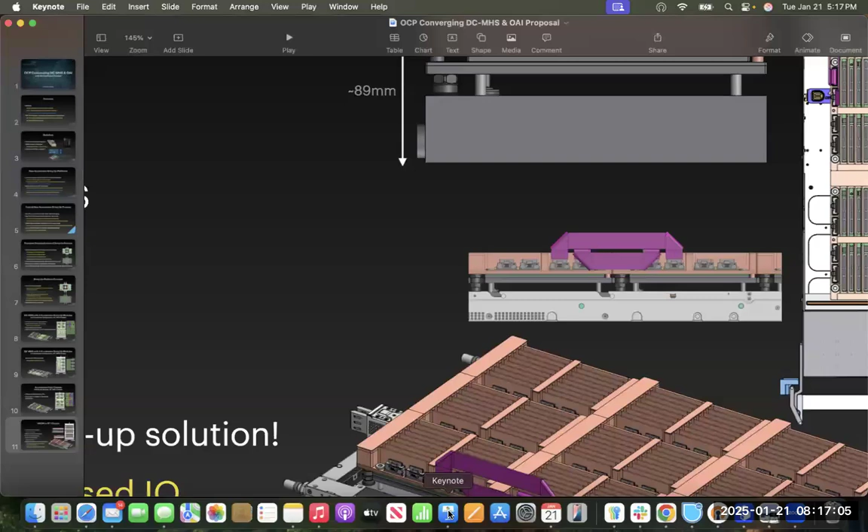Okay, so what I wanted to do is switch back to our presentation from the last meeting, where we were talking about this Bring Up platform and the migration we're seeing. We're talking basically about the Open Systems for AI initiative, which is looking at bringing the DCMHS and OCP OAI chassis together in what we're calling Open 72, taking inspiration from what NVIDIA have done, from their DGX HGX towards the NVLink NVL72 rack scale computing.

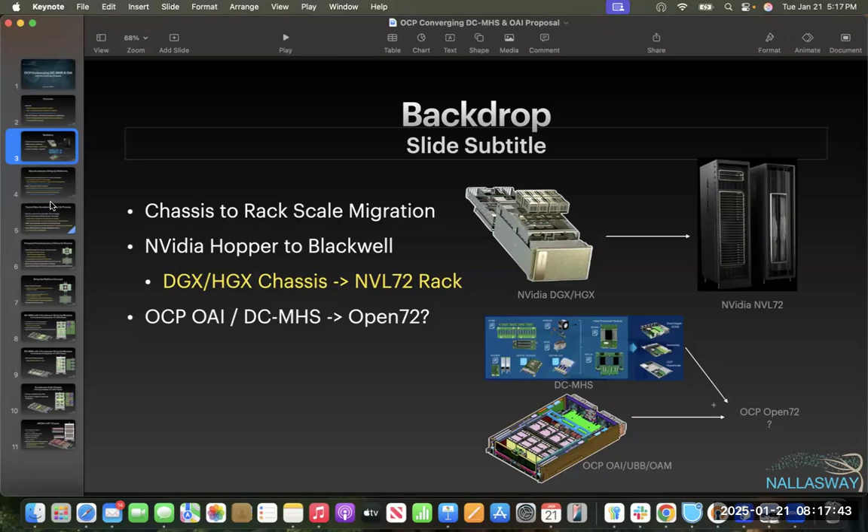What we were talking about is this Bring Up board as maybe a nice concept that we could bring into making deployable Bring Up products that could be integrated into DCMHS, and actually have a process that we were talking about here.

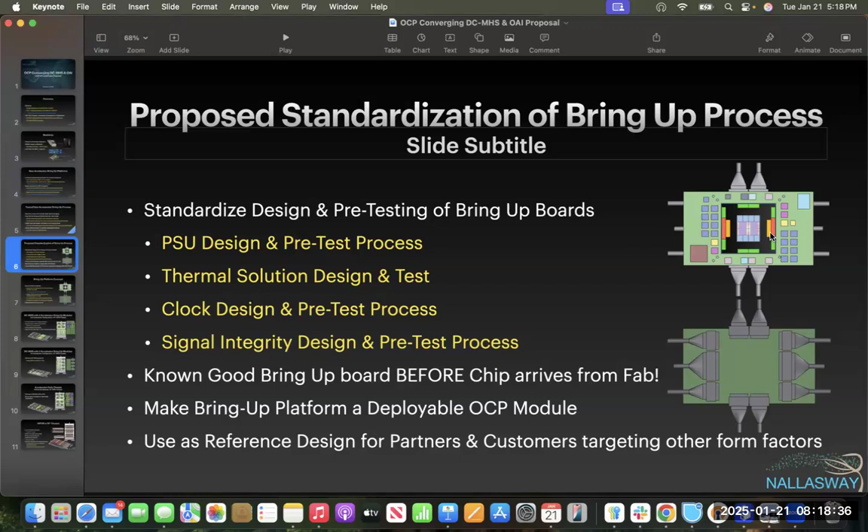These pictures here were the basic idea of having a cabled module where we could cable things together inside the DCMHS chassis. For those of you that remember, we were having the interconnect brought out underneath the cabled I/O so that the tops would be clear for thermal management—either water cooled, hybrid water and air, or an air cooled solution.

So we went through some pictures of that, showing 4 modules cabled up with these HPM, the CPU boards that are part of the DCMHS standard. We started in a 19-inch rack. In my efforts, we're probably going to switch over to the 21-inch rack as a preferred solution, but I did want to try and squeeze this into a 19-inch, so it was an option. This picture here was showing the potential cabling of a particular given topology and how that would look.

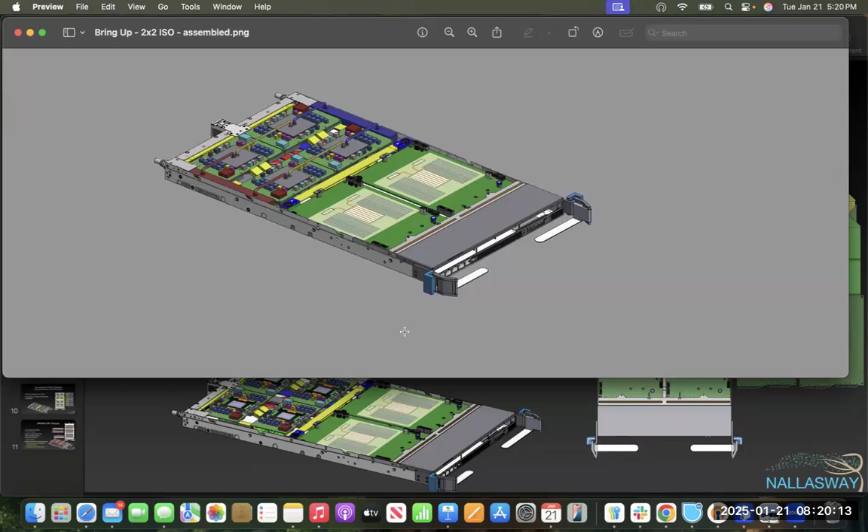Let me just grab a couple of pictures here. So here's our latest update. We started to integrate in some of the water pipes coming in - this is like a water cooled example, can we get all this and fit it into a 1U box? We've got the cables underneath, so we're trying to put some infrastructure into the chassis. Again, this is cartoon stuff - I'm not a mechanical engineer, so this is just cartoon stuff that maybe we can get mechanical engineers to at least have a starting point as to what our thinking is like.

What did I want to show? This one here is maybe a good one. This is the back side of the modules, and the key thing here is these connectors. As you can see, we've got a frame here, and this frame needs a little bit of modification still - it's not the finished article, but this was going to give stiffness to the board. It was also going to hold these connectors in place mechanically, which I'll get into in a moment. Also, if we did have vertical power delivery, this could provide a little bit of a heat sink for cooling the vertical power regulators on the back of the board - you could get airflow across them.

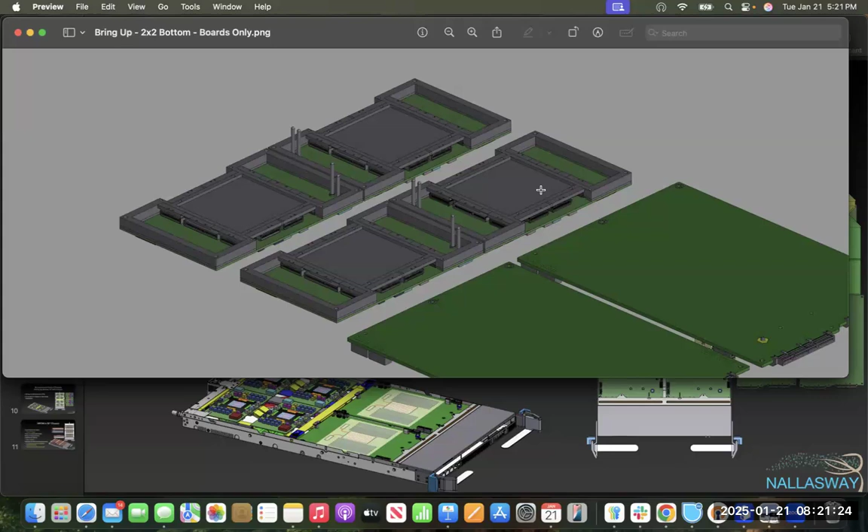So that's where we've got with the concept, and I'm starting to talk with full-on engineers in terms of getting this modeled up properly. Diving into the connectors, let me just bring the model up itself. So here is the model, as we can see, with this frame on. If I just take the frame off a moment...

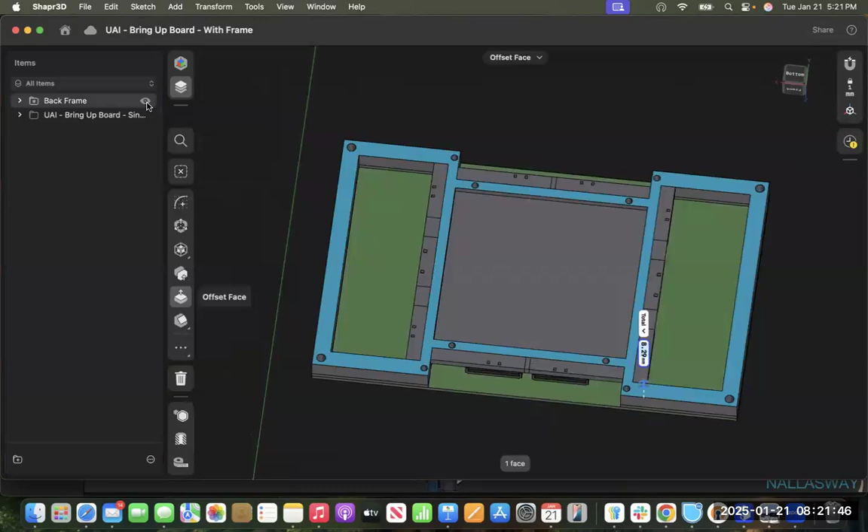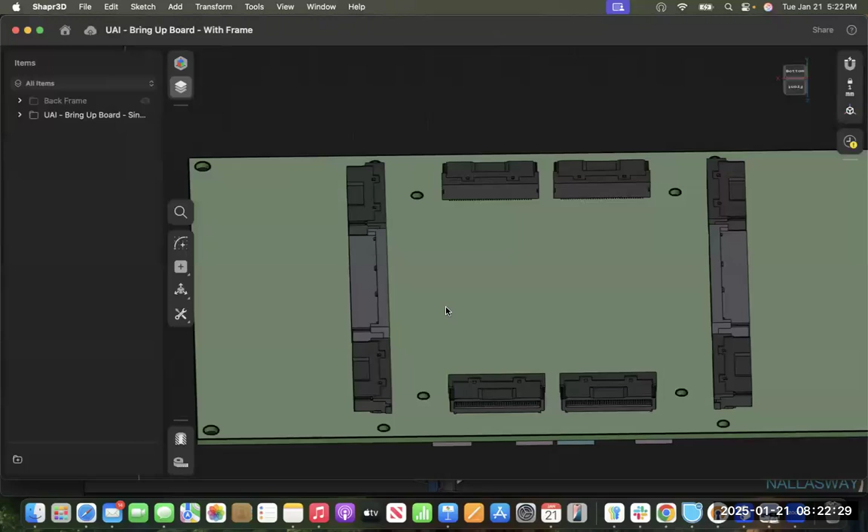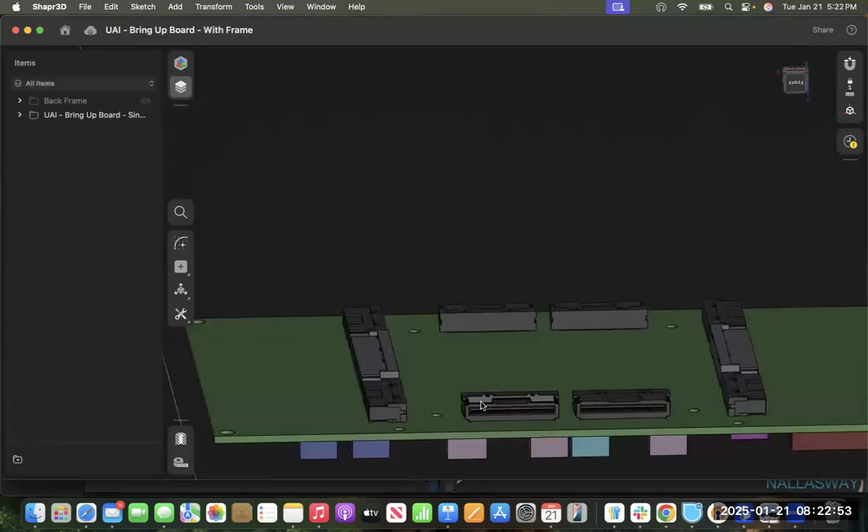So what we've done is - this is a standard MCIO connector, but we've actually taken the metal shell off of it, which also had the through hole features in the metal shell. So this is just the plastic bodies, and they also had plastic alignment pips that were needed for going through the board, and we've got rid of those as well. So these are full surface mount.

I wanted to just start asking a few questions of our connector experts on the call in terms of what we're doing here. So firstly, that's the idea - we would pick and place these connectors as we see, and the first problem that comes up is their alignment. Without the alignment pips, what is our probability of getting a good alignment? I guess while we're on that part, let's just cover that now.

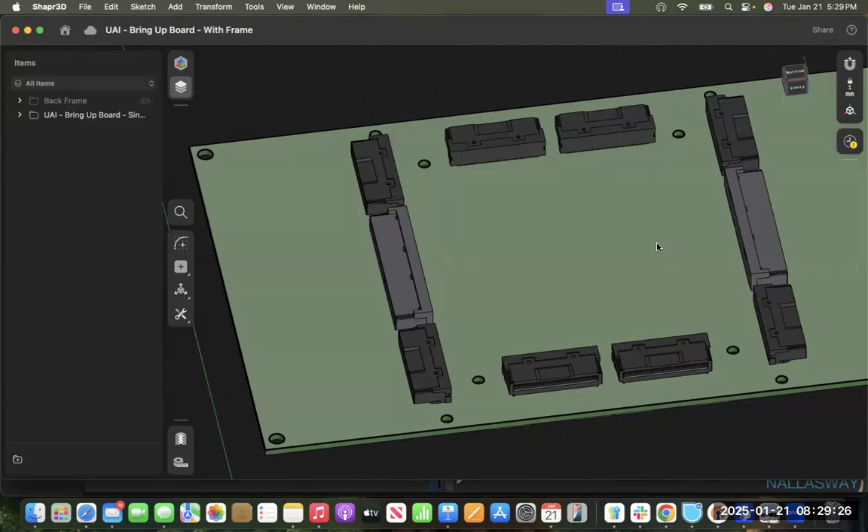Are you familiar with that approach when you're putting multiple connectors down, and have you guys ever done that? I think that's somewhat common, that there's a frame, but the pick and place process is incredibly accurate, and the vision systems used for lining things up do a great job. But if you look at this connector, there's airspace underneath, so there is an opportunity for the connector to tilt. Oh, there's some feet on these. Yeah, you got some feet on this. Okay, and this is just the plastic bodies, by the way, at the moment.

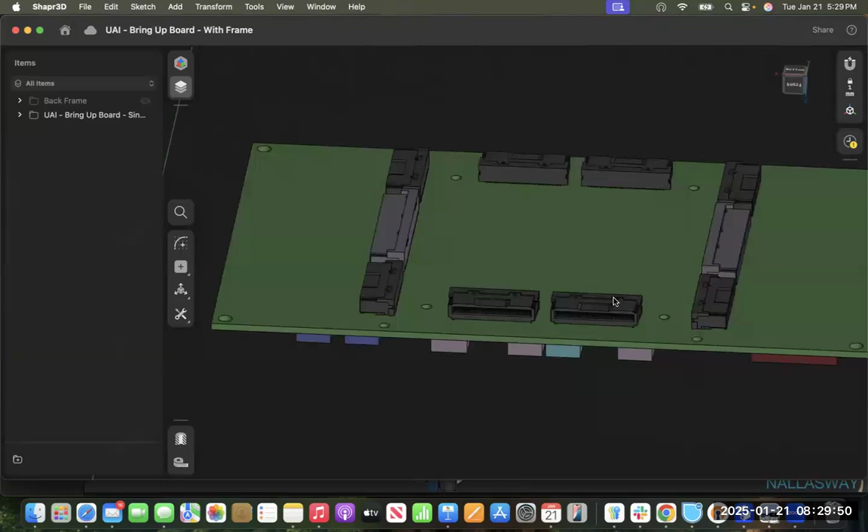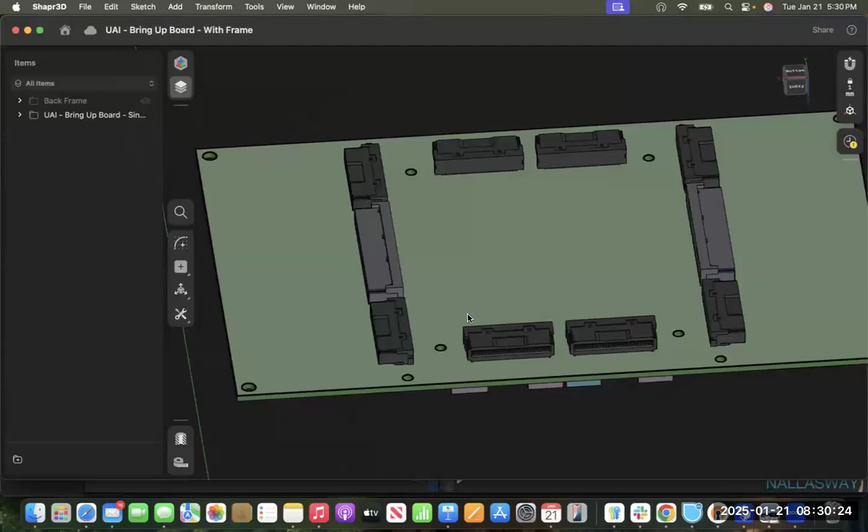So all right, I guess the general feeling is either we will be okay with alignment with the pick and place itself or the capillary attraction, but a jig is not necessarily a bad way to go as well, if we want to build a frame where these connectors would be picked and placed as one big unit, and then get their alignment with these other holes. Yeah, I just am still concerned about the leverage. Because there's going to be a pretty tight radius coming off of these parts. You're expecting to plug them and then make a sharp turn. Yeah, so that's where the frame comes in.

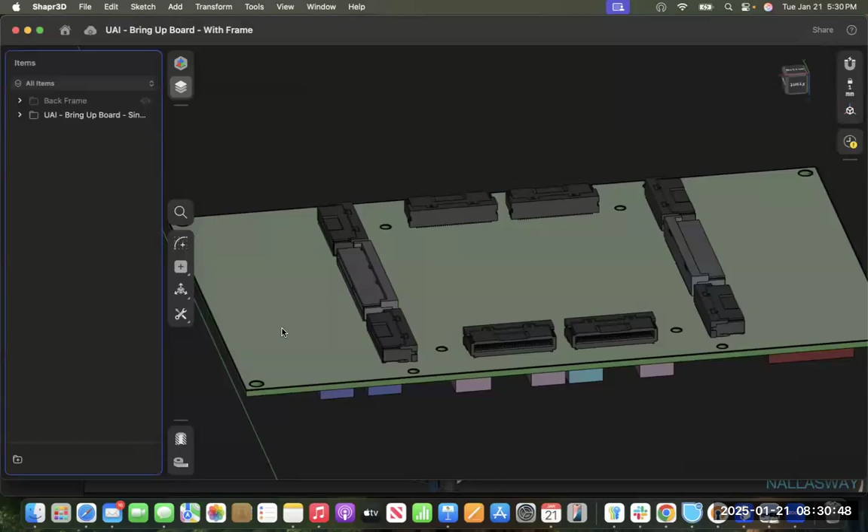So what we've done is we've taken off the metal shrouds and the through hole legs, and we replace it with this overall frame. Hang on a minute. It's frozen now. There we go. Thank you.

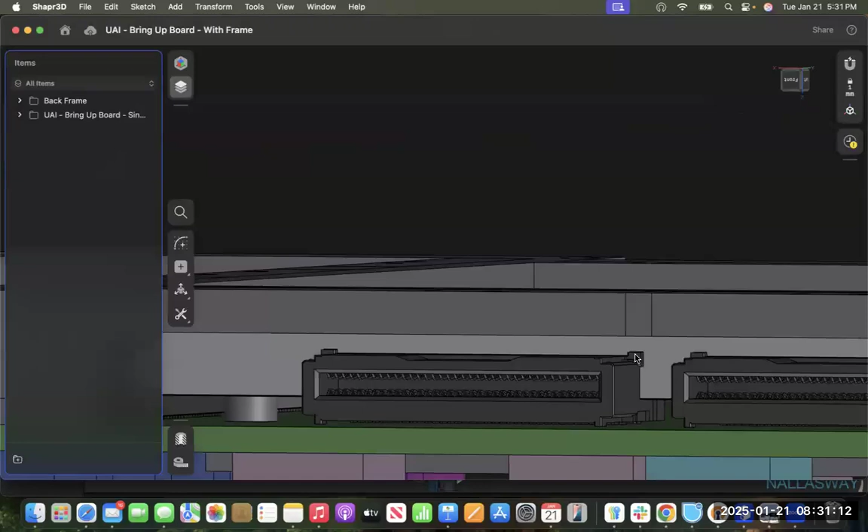So you can see here that basically at the back, this frame would mate and you'd get a friction grip at least with this frame and the connectors replacing the previous bodies that were there. So that would be the idea. And even the latching holes, if you had the same cable latching holes, would be built into the frame, so you'd still be able to clip the cable into place. I can just switch to one of the pictures.

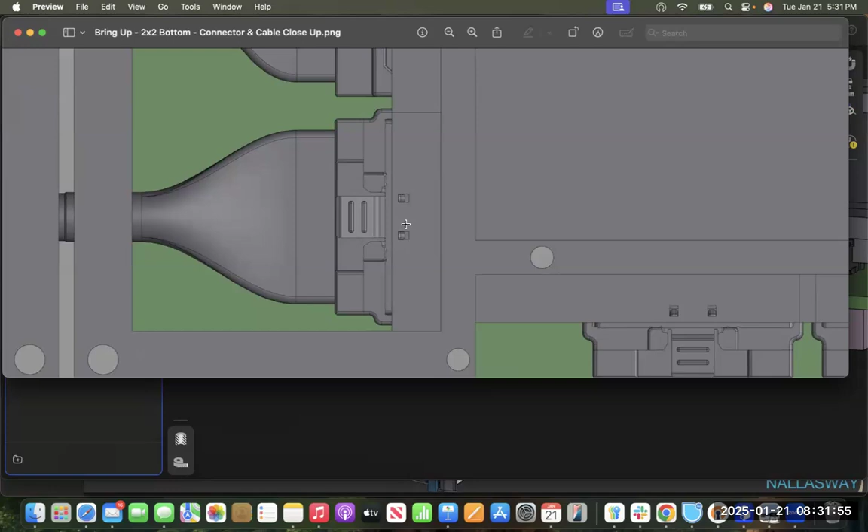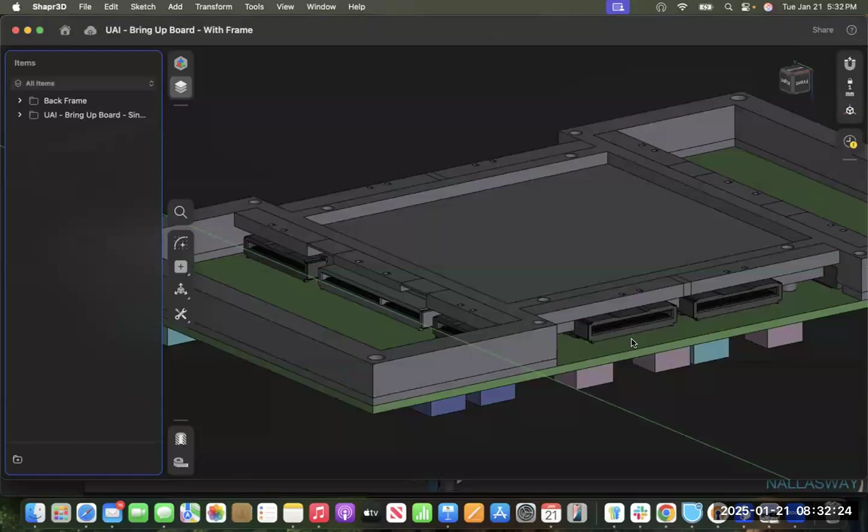Here's a close-up of a cable plugged in with the frame, and you can see it keying in. So basically, this entire frame provides stiffening for the board, holds the connectors in place, and additionally, if we've got vertical power devices, this can provide heat sinking to the vertical power devices on the back of the board. So this has got three purposes as well as being stiffener. Now ignore these very high edges. These are going to be dropped around here, so the cable can more easily exit.

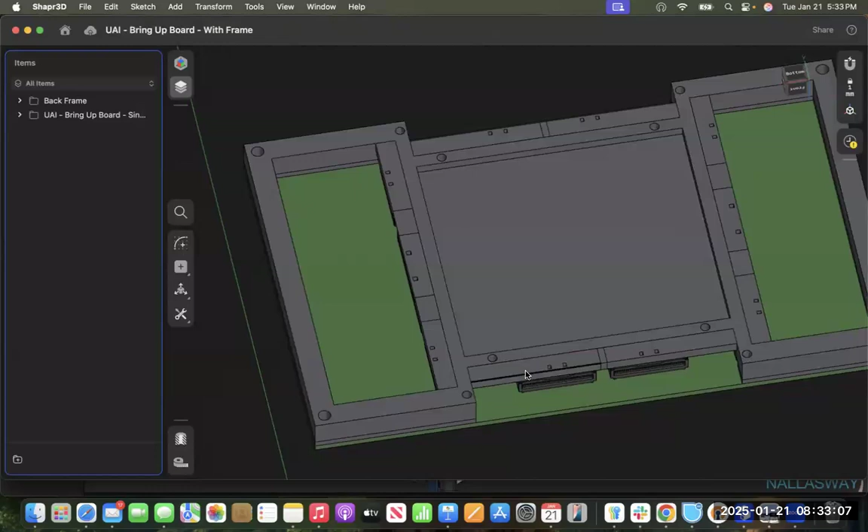So does that allay your fears, Howard? Does that make sense, or am I missing something? Yeah, that's better. Okay, good. All right, so that's that side of things. So if I'm hearing right, please correct me if I'm taking too optimistic a view, we don't see this as an insurmountable approach to these connectors. Is that fair to say? Yeah. Okay, good. And Z, are you happy as well? Yeah, I think I agree with the principle here. Okay, great.

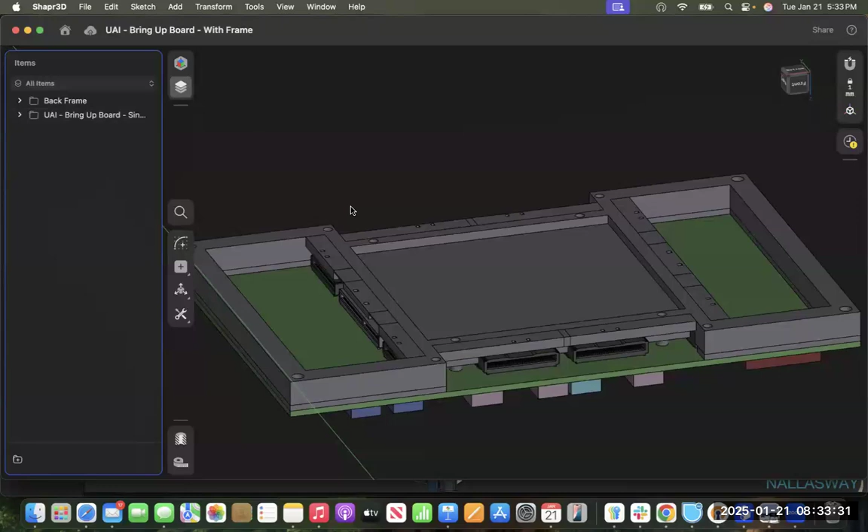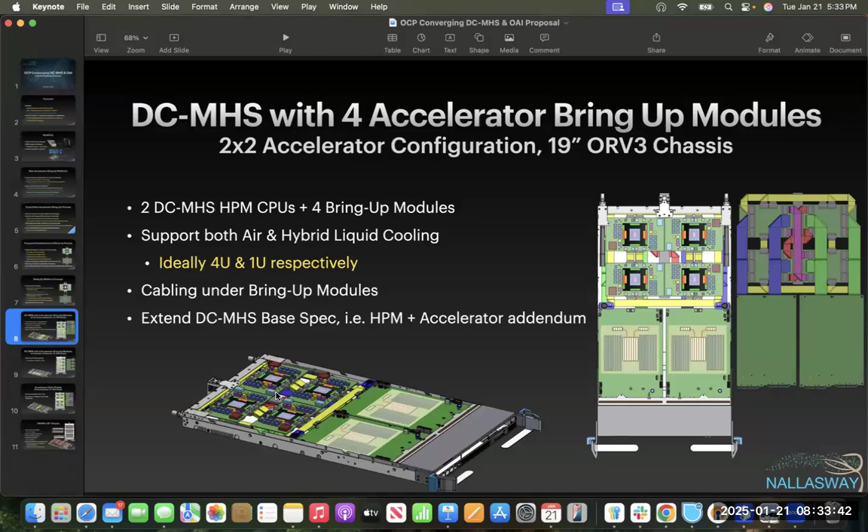All right, so that covers the basic connectors. Now, the other discussion we had a little bit offline was the cable bend radius. Now in this particular one, I don't think we have the cables, so I don't have it in the model. Let's go back to our presentation here. So there's a couple of things if we just zoom in here. This is a view from the top.

So we've got our cables plugged in. There's a couple of areas. Now look at what we've done here. We've got a cable just going this very short distance between two modules. And when I was at Molex, I do remember that there was a certain length. You couldn't make them very short. You couldn't make them just as short as that gap. So there's a minimum length of the cable.

So what we've shown here is like a three-way fold. So the cable ejects out, it bends downwards, it folds around, it folds back, and then plugs into the other one. So I'm not sure what the total length of this is, but do you have a minimum length of cable on an MCIO cable that could be built? It's just a manufacturing process that limits the shortest length.

Alan, are you there? We have tried 150 millimeters. Sorry, you have tried what? 150 millimeters for the MCIO. So that's about 6 inches, I think. About 6 inches. And you say you've tried it. Does it work in volume or not? It's a prototype build only. It's prototype only, 150 millimeters. Yeah, for SI testing.

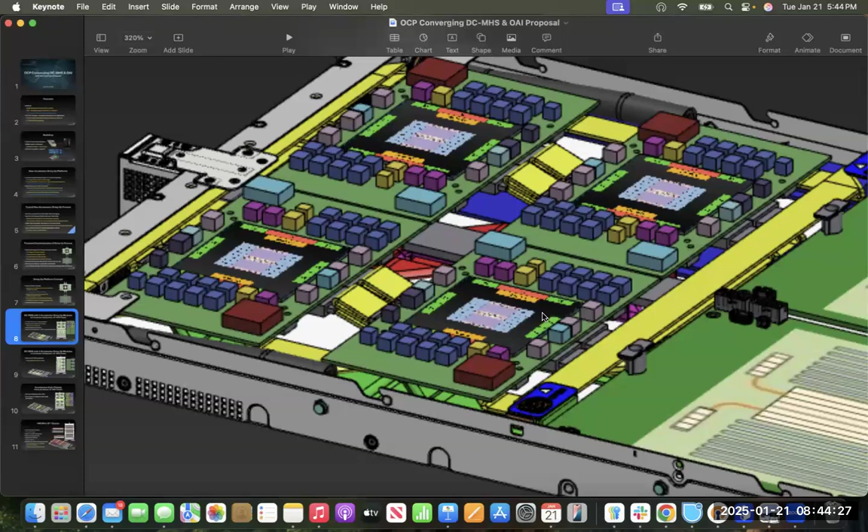If you look here, we've got 3 folds. So if this was 50, that would be 150. But I think it might be 30 actually, so we're looking at about 100 millimeters of cable here with a triple fold, or a double. I see. But if we could do a flexi that was just around 50, that would be a great solution there. Now on the others, let me just bring up this one here. You can see that we're basically going through 90-degree folds.

I remember in our email conversation, we assumed that the flat cables, where you've got 2 twinaxes sitting on top of each other, would be about 2 millimeters thick, and we assumed an internal bend radius of 2 millimeters. So a completely folded cable from top to bottom would be 6 millimeters, if I get that right. But Z, you were saying we should have a 3 millimeter internal radius if we wanted to get up to the higher speeds. Was that right?

Yeah, that was when I was thinking about higher speed and long reach. You actually have a very short cable, and now I'm wondering what's the longest cable. When you get to a half-meter cable length, then to get to the higher speed, like 224, I believe we need to go a little bit thicker on the conductor. So the cable size will grow, and then certainly the radius. That's why I reserved a little bit of space for that.

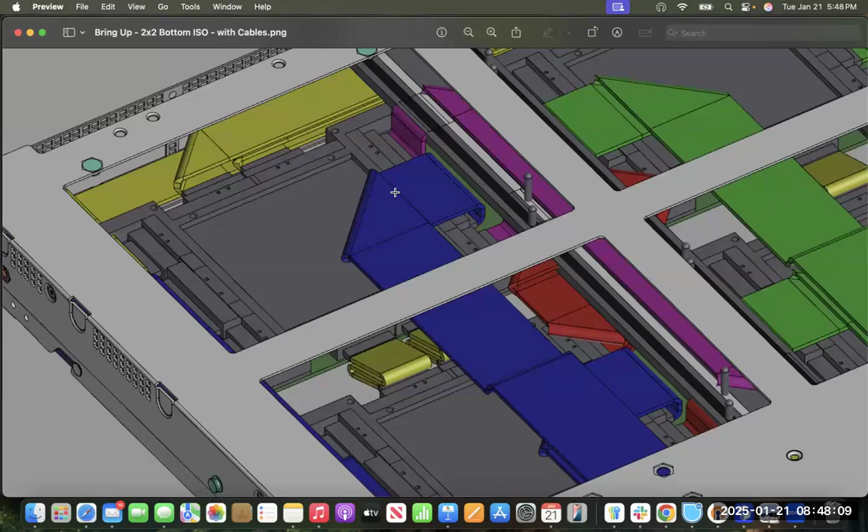The bottom line here is we are layering a few of these maybe on top of each other. Maybe they're not on top during the fold, but where I've really concluded is we probably need about 10 millimeters from the base of the board to the bottom of the chassis. And here, by the way, this is the bottom of the chassis. You can see that we've got windows in, so you can actually plug these cables in from beneath.

I don't think we need this T-bar here. That can be open. So this is where some refinement needs to be done on the mechanical engineering side. But the idea was if we keep this, and another thing I was thinking of is if we think of an OAM module, typically an OAM module is going to have a motherboard underneath it that we don't.

And I think the OAM module, the mezzanine connector, the underneath of the OAM module to the top of the motherboard is like 5 millimeters. Then I think the motherboard's of the order of 3 millimeters thick. And then I think there's a protection plate under that. So you're probably in the region of 10 millimeters from the base of an OAM module to the chassis bottom. So I was thinking if we can keep that 10 millimeters under the board, then we'd be in pretty good shape with all the cables, if that makes sense.

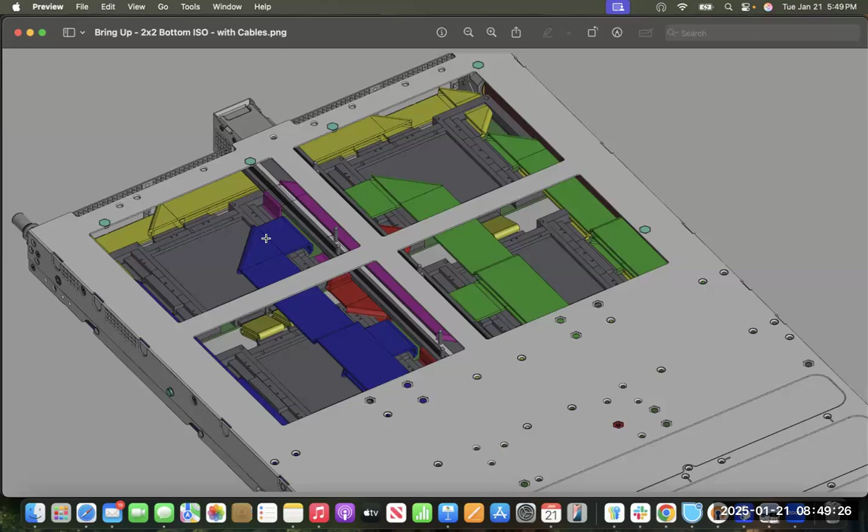So I have another thought actually. Certainly, I think you have the limitation of the bottom space, right? So that's why you try to use the right angle connector. Yes. But the whole industry trend right now is going with the vertical connector. The SI on the right angle is very challenging. And the vertical connector, actually the mating height gets lower and lower. So the right angle is kind of losing the attraction.

So I'm trying to think, if you can reserve maybe 11 millimeters, then maybe you can use the vertical connector instead of the right angle. Okay. But vertical on the bottom of the boards? Yeah, vertical and the right angle plug. So it's a vertical receptacle, but with a very short right angle cable. Right. Okay.

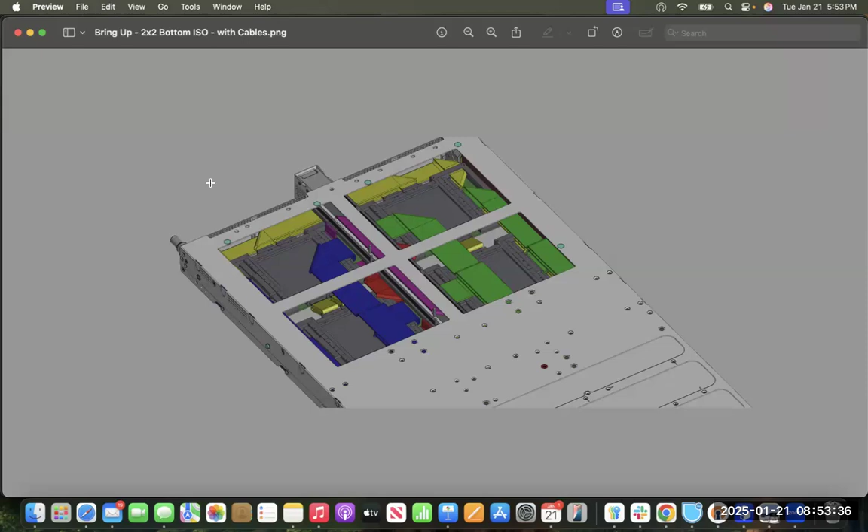I guess what we need to do to really get to that, though, my honest opinion here is, when we come to adding it, what the height of this board will be and whether we can get the heat sinks on and still stay in a 1U chassis. I think that's a burning question. If we need 11mm on the back of this and a 45mm 1U rack, can we still get these water-cooled heat sinks on? So that would be the question.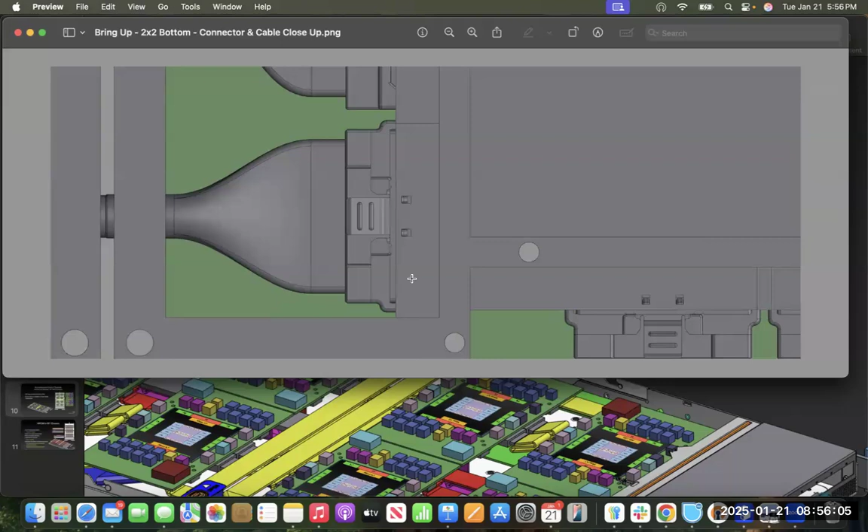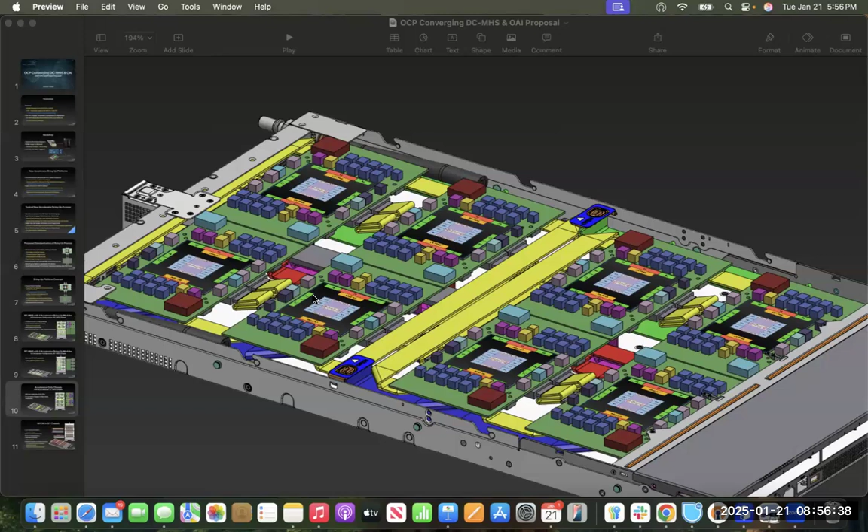All right, we've just got 5 minutes left, but I don't have a lot to talk about on the HPCM, but I did want to start kicking it off. I didn't get a chance to make any upgrades to the models, but I have been speaking to Bijan. I don't know if any of you guys have got a 21-inch OCP rack chassis model that you could throw my way, but it would appear that no one has contributed a 21-inch DCMHS rack 3D model to the consortium. So I'm struggling to get a 21-inch rack at the moment. But here, let me just put it in display mode. Sorry.

The wall has facility power going down it as well. So there's a power supply in that wall. For every module, there's a local power unit that converts the facility power to the 48 volts. So you've got a very, very short path from facility power to the point of load. If you look at the NVL72 system, they have got up to 2.5 meters between facility power and their point of loads, so there's a lot of opportunity for loss feeding their modules. So this is one of the benefits of our approach.

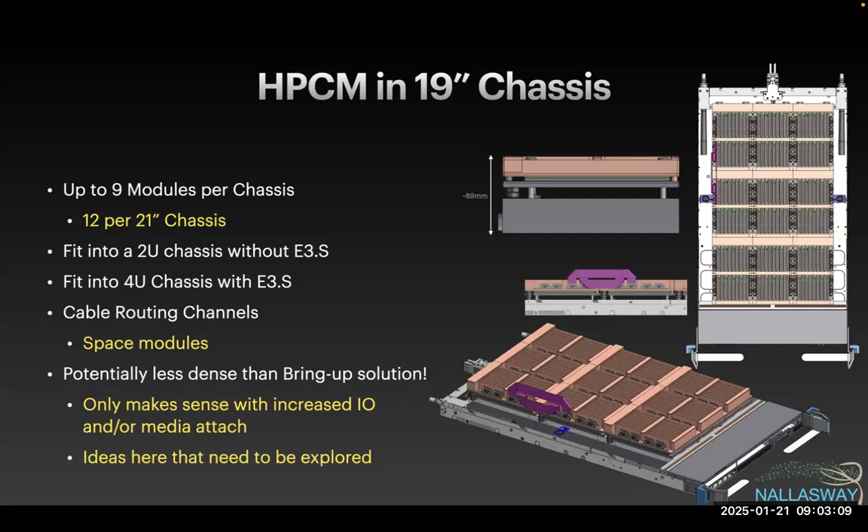Okay, so that was really all I wanted to give you an update on. I am still making progress there, and hopefully we're trying to get the attention of everybody. So, Mohammed, if everyone's still on - I know we've run over a little bit.

Alan, one question on the cable here. Is this open to another configuration to possibly reduce the height or the bending? The cable configuration that you have in the model, it's like a straight plug, right, similar to the one that you have in the other slide. Because there is another version of the MCIO plug, which is what they call a side exit - it's like a flag style connector. So the cable actually exits to the right, that's what you're saying, right? Yeah, right or left, yes.

Yeah, no, that was what Z was saying, I guess, for the 11 millimeters, right? It's - I believe Z is referring to a traditional vertical right angle that would reduce the Z height of the mated connector. What I'm talking about is another version - it's also a right angle, but it's like a flag. Oh right, is this an MCIO version, or is this a completely different connector? It's an MCIO version also. Oh right, okay, well if you can share some data on that, that would be great.